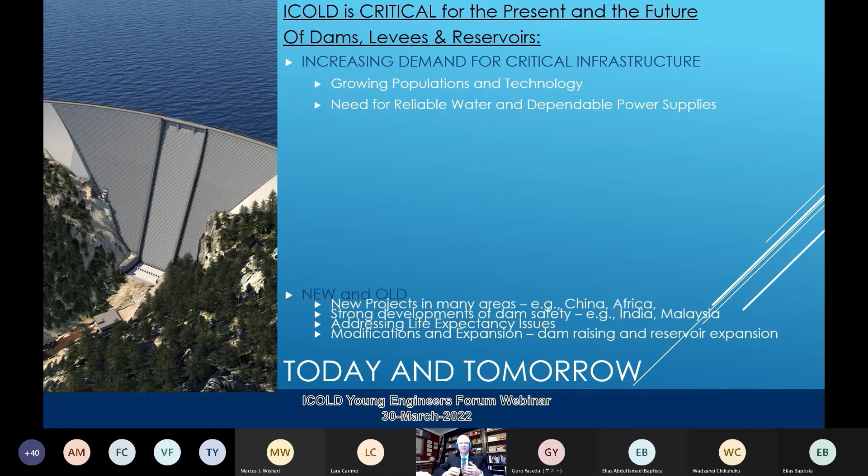We are looking at both new and old aspects of what we do. As engineers and scientists, we are confronted with new developments, but we're also dealing with old projects. Many new projects continue to be developed around the world, especially in areas like China and Africa, where there are very large demands.

We also see strong developments in dam safety programs, which is great. It's an area that's very close to my heart, dam safety, and it has been for ICOLD for a long time. We like to see countries like India and Malaysia and others developing national dam safety programs and codifying regulations to help dam safety, improve dam safety, and protect precious lives around the world.

As we work in these areas, we address the life expectancy issues of our structures. Many of our projects are 60, 70, 80 years old, sometimes more than 100 years old. These older structures require so much care and maintenance that we have to be part of that. Seminars like this today address the modifications and expansions, dam raises, reservoir expansions, and sometimes replacements of dams as the original dams no longer meet the design criteria.

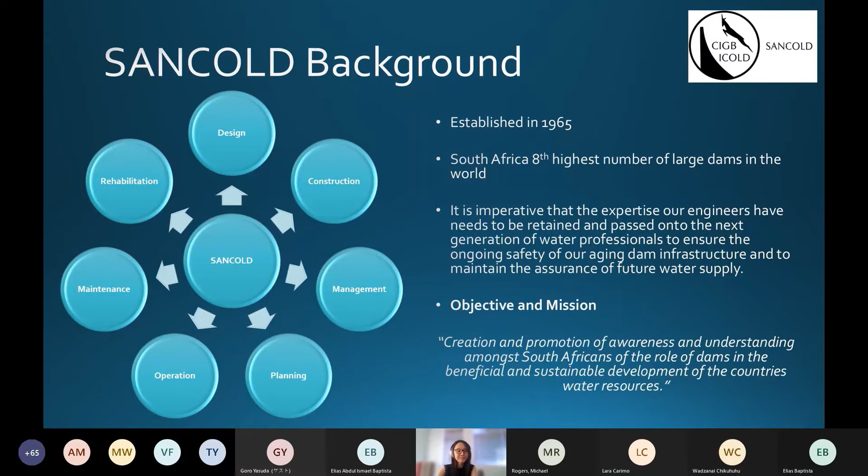So as SANCOLD, our objective and mission is the creation and promotion of awareness and understanding among South Africans of the role of dams in the beneficial and sustainable development of the country's water resources. SANCOLD does this through advancing the knowledge and skills of design, construction, management, planning, operation, maintenance, and rehabilitation amongst our members. The SANCOLD-YPF was established in 2012.

It was mainly established for our members under 35, allowing for a forum for us to interact and network with each other. Our objectives and mission is to transfer skills and knowledge from our older engineers to our young engineers to attempt to fill the age gap that we experience majorly in South Africa. We also want to knowledge share through our webinars, courses, and our online communication platforms, as well as create networking and career opportunities for our engineers and mentorship for professional registration and becoming approved professional persons.

So the SANCOLD-YPF committee is democratically elected by our SANCOLD members. For 2022, we have myself - I am a dams engineer based in South Africa. And then we have Dr. Louis Kutzer, he is a senior lecturer in the civil engineering department at the University of Pretoria with a keen interest in CFRD modeling. And we also have Dr. Janine Vonkerman, a water engineer specializing in sediment transport, river hydraulics, and hydraulic structures. Also, at the end of this year, we will have a position open for our YPF committee, so if anyone is interested, please put your name forward.

For 2022, we are working on developing a 2-year outline plan of webinars and longer courses for our members, allowing for skill set development. We are also indexing existing conference papers, allowing our members easy access to these. Another thing is forming strong and long-lasting relationships with other professional committees, such as SwissCOD-YP, MozCOD, and ICOLD-YP, allowing our young engineers to share experiences and knowledge and network with each other. We have a list of activities for 2022 - I won't speak about them, but if you're interested in attending any of these, please feel free to contact us, and we'll be able to engage with you and share our knowledge as well. Thank you.

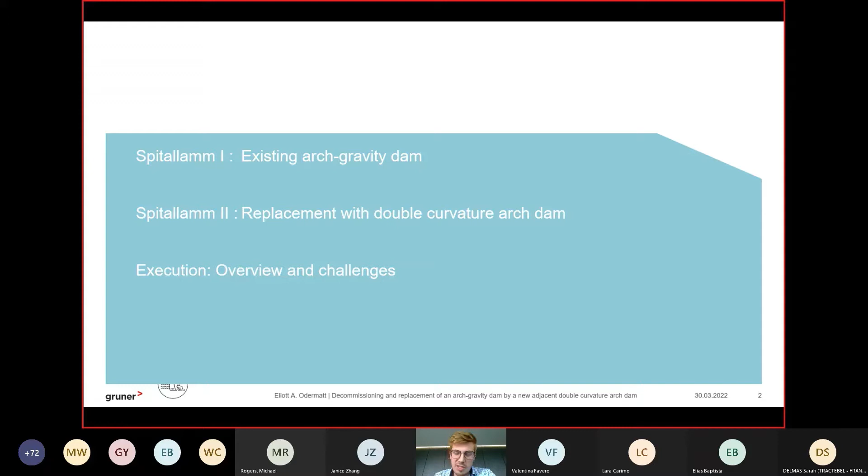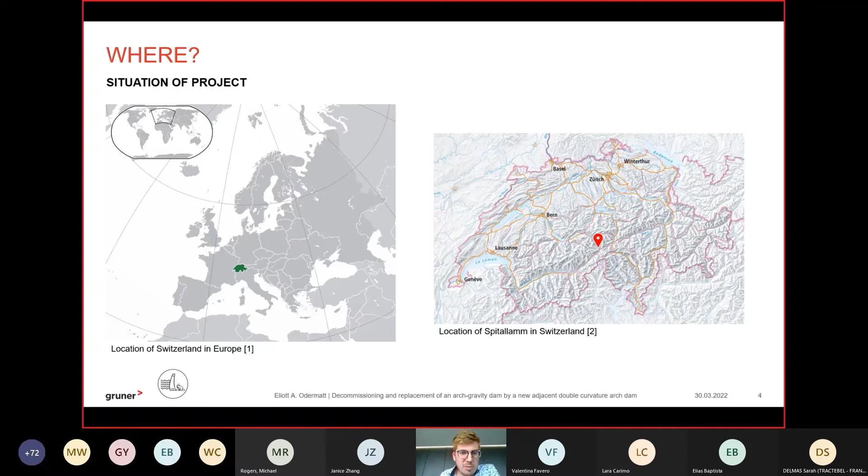Spitallamm 1 is an existing arch gravity dam. We are in Switzerland, in the middle of Europe, with the typical landscape of the Swiss plateau, where we have our big cities, and the dams located in the Alps. The Spitallamm Dam is in the Bernese Alps, near Interlaken and the Jungfraujoch or Aletsch Glacier. Zooming in more, Spitallamm 1 closes a reservoir called Grimselsee Lake, together with another dam. We are located above 1,800 to 1,900 meters above sea level, with a reservoir volume of 100 million cubic meters.

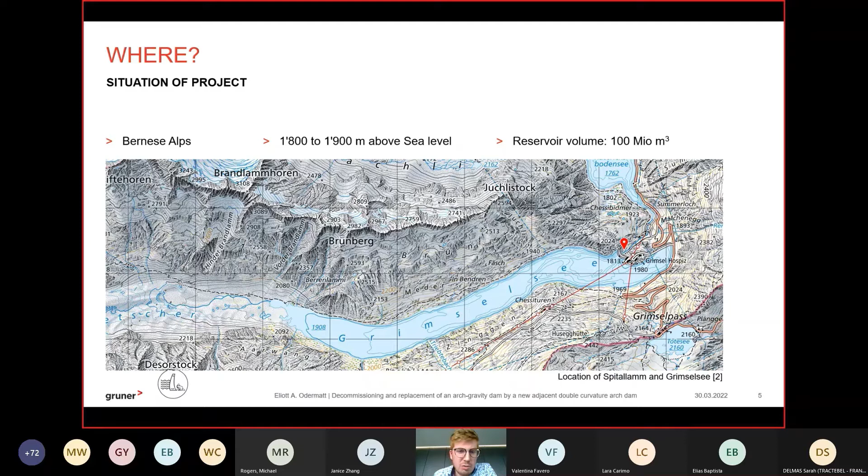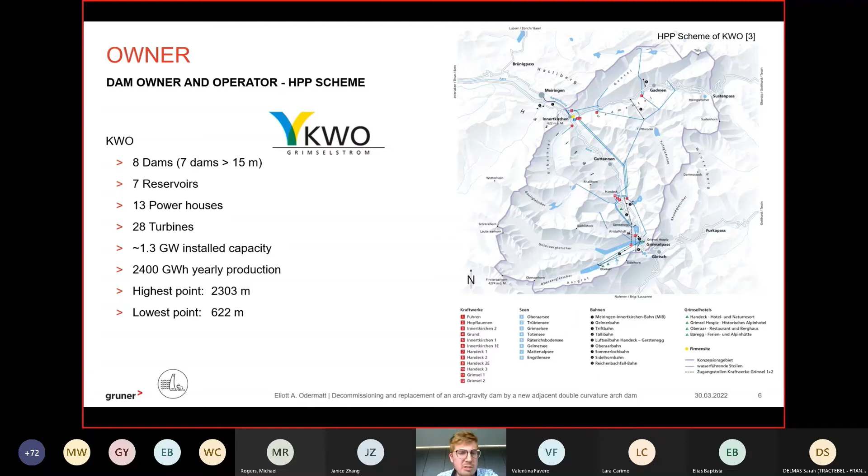A few words about the owner and operator of this dam, because it's important to understand the project. The owner, Kraftwerke Oberhasli, has a scheme made of 8 dams, of which 7 are higher than 15 meters, 7 reservoirs, 13 powerhouses, 28 turbines, more or less 1.3 gigawatt installed capacity, and 2,400 gigawatt hour yearly production. The highest point is 2,300 meters above sea level, and the lowest is 620. It's a typical alpine hydropower scheme, as you can see from the difference in head, and one of the big players in electricity production in Switzerland.

Now to the existing dam, Spitallamm 1. It's an arch gravity concrete dam, built between 1926 and 1932, founded on granite and granodiorite, so very good rock. It has a height of 114 meters from its lowest foundation point to the crest, a crest length of nearly 260 meters, and a concrete volume of 340,000 cubic meters. At the time of construction, it was the highest concrete dam in the world, later becoming second when the Hoover Dam in the US was built.

What is important to understand here is that the dam is made of 3 types of concrete. There is the mass concrete. Then we have an upstream concrete with higher cement content for better water tightness, and to allow the heat dissipation of this higher cement concrete, a void was left behind it, which had to be filled later with a filling concrete.

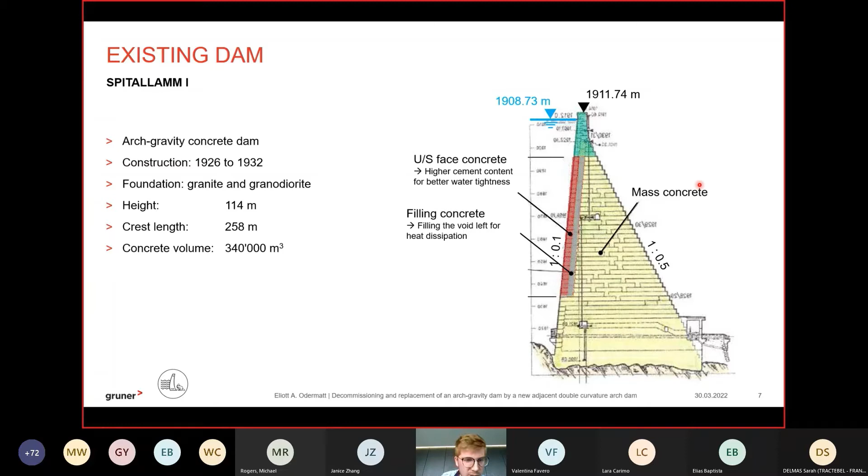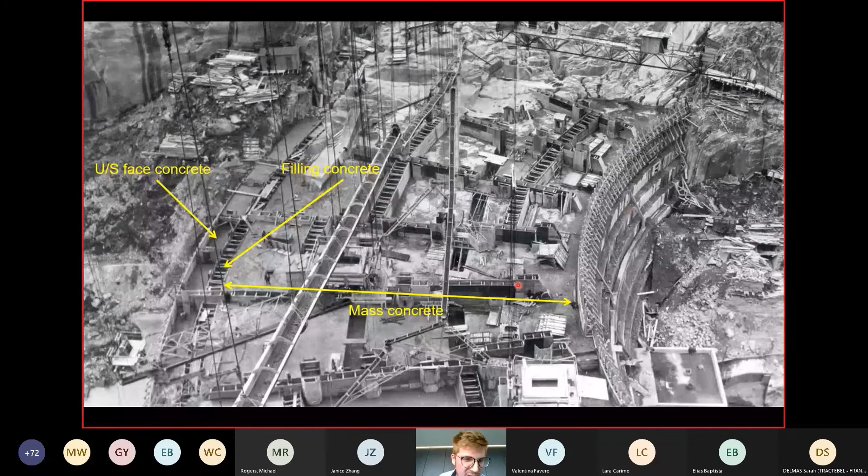Because of the aging problems, the opening trend leads to an intolerable deterioration of safety, and the need for action was proven and was recognized by all the stakeholders.

Now we will focus on Spitallamm 2, so the replacement with a double curvature arch dam. So what are we doing now? We are building a new double curvature arch dam that is adjacent downstream of the existing dam.

And what are the advantages? We have no interferences with the operation of the reservoir. As long as this dam is in operation and this one in construction, the reservoir can be operated. Also Spitallamm 1, the existing dam, is left in place and is then bypassed by a water level equilibrium gallery. That means we don't need to demolish, we don't need to transport the material, and we don't need to store the demolition material. So we can spare a lot of money by operating the reservoir and by leaving the dam in place.

And also, this new dam gives us the possibility to heighten the dam at a later stage. That is a wish from the owner that has a project under discussion. So the dam is designed to be heightenable by 22 meters.

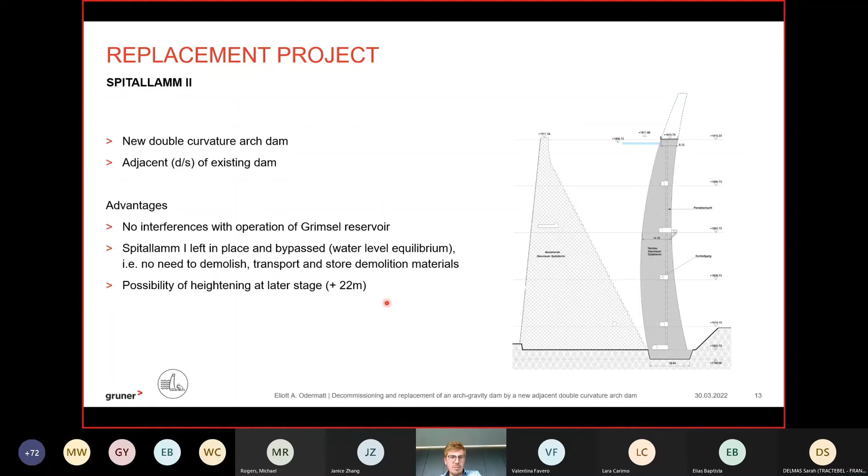So some facts about the geometry. The geometry of the new dam is an arch dam with parabolas, with a height of 113 meters that can heighten by 23 meters. The crest length is about 209 meters with a width of 8 meters, and 4 meters for the heightened dam. The thickness is about 20 meters at the base, and the concrete volume is 210,000 cubic meters.

We see the difference with the existing dam, which was 340,000 cubic meters. We can spare 40% of the concrete thanks to this arch dam, and the thickness at the base is also very self-speaking about the advantages.

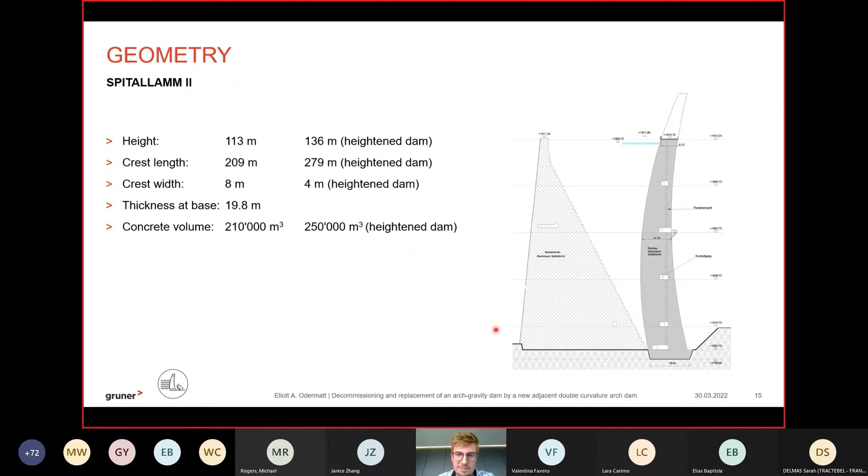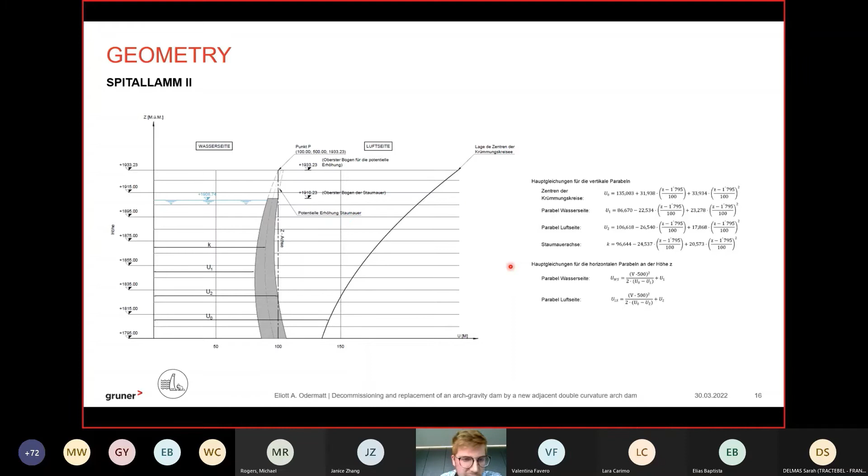So why an arch dam? We are in a narrow valley, so it's perfectly suitable. As I said previously, we chose the parabolas - a parabola arch dam - and here you can see the center of the circle and the equation. We can recognize the typical quadratic equation of the parabolas: the quadratic term, the linear term, and the constant term. These are the equations defining the geometry of the dam.

Here also in plan view, we can see the two main parabolas in blue, upstream and downstream. And also we have the red parabolas here, the abutment parabolas, where we need more thickness because of the higher stresses.

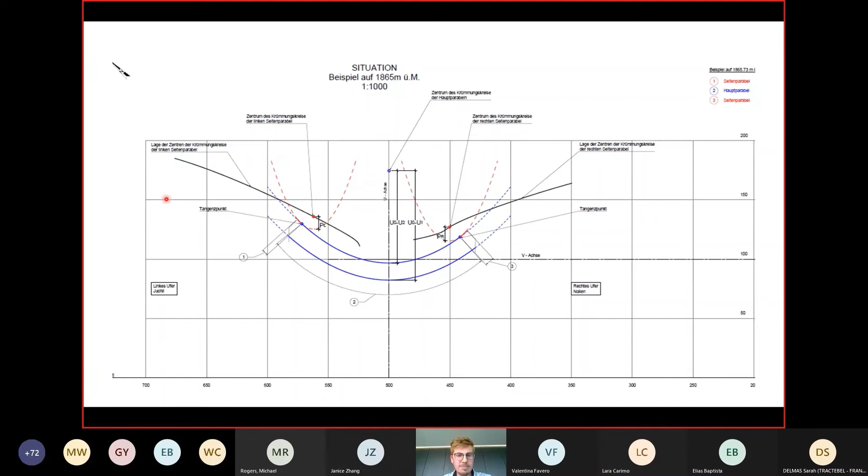So that's about the dam and the geometry. Now I'd like to give you an overview of the construction, the execution, and the challenges.

So the schedule: rock excavation started in 2019, with 2 years of rock excavation. Then we have 4 years of concrete pouring, from last year, this year, and the next 2 years. From next year, we will also start joint and rock grouting, and the last year, '25, will be impounding.

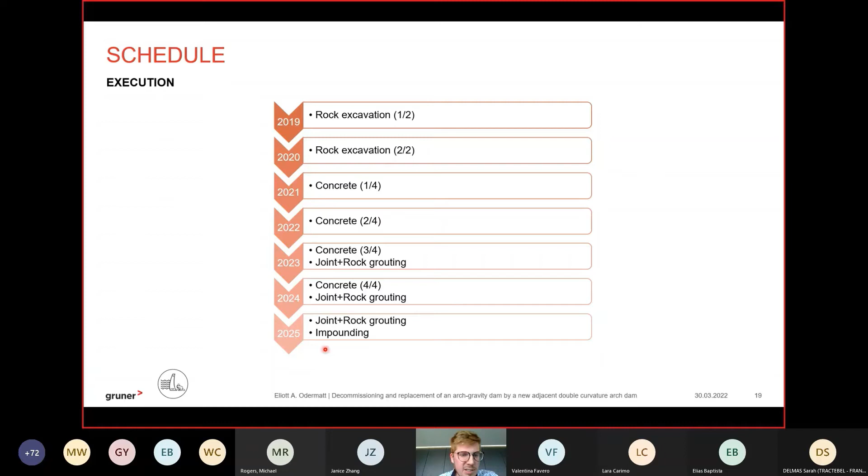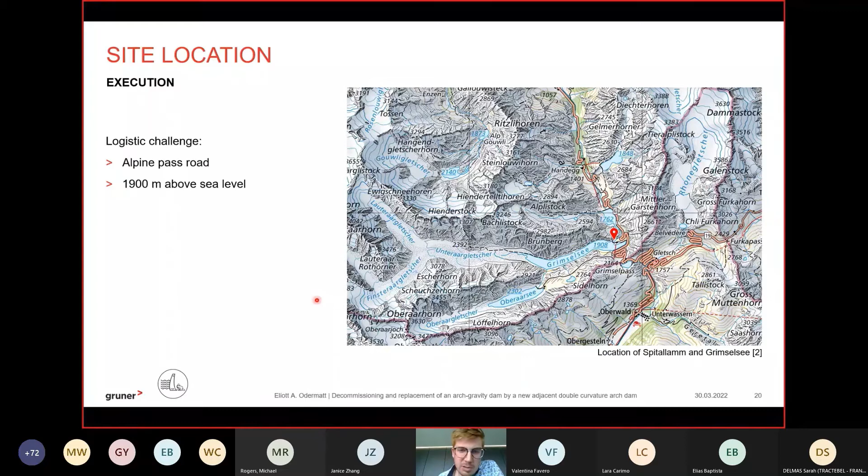So for the site of the execution, here I take you an excerpt of the Swiss maps. You can see we are on an alpine pass road that is nearly 2,000 meters above sea level. So you can imagine the logistic challenge to bring everything up there: the cement for concrete, the people, and all material.

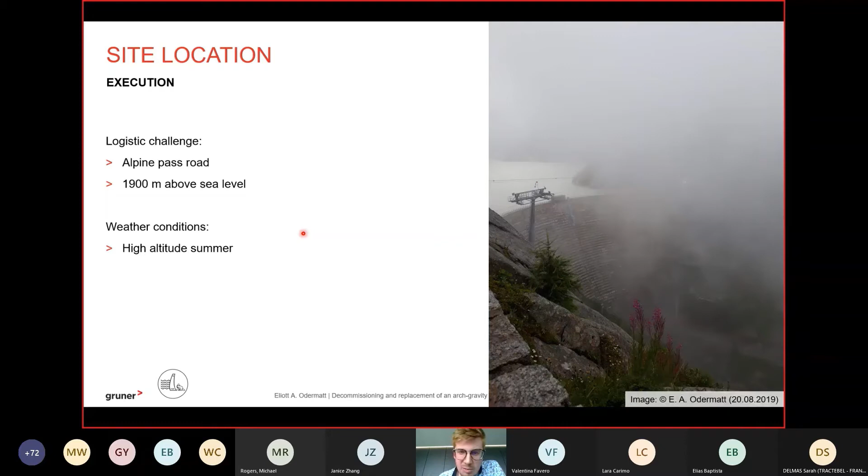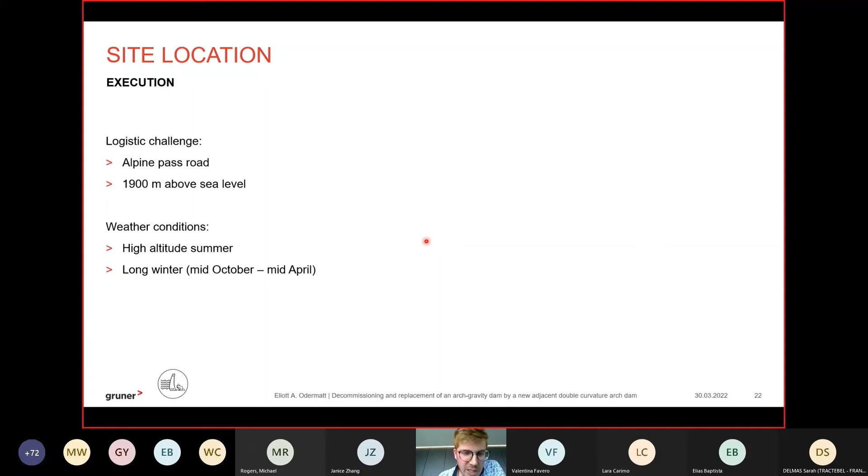Also we are very high in the Swiss Alps, so you can imagine the weather in summer is not always perfect. That's a picture I took on the 20th of August, so it's summer in Switzerland, but up there it was totally cloudy. And we also have a very long winter at this altitude, about mid-October to mid-April. Here are a few pictures so you can imagine.

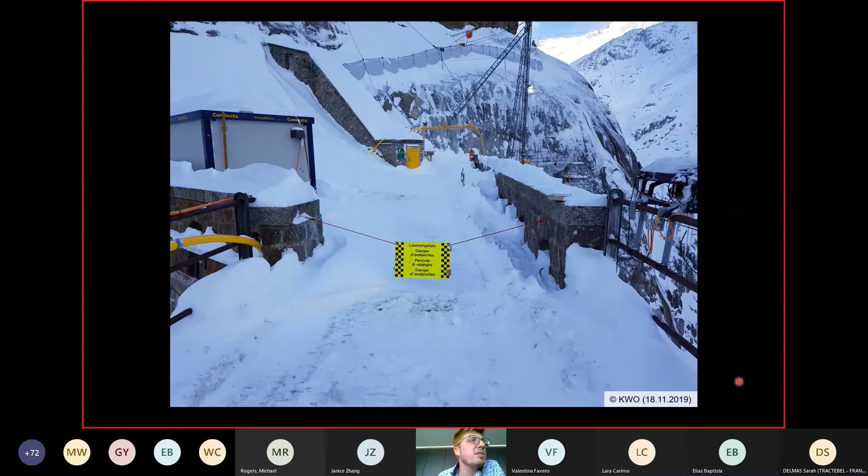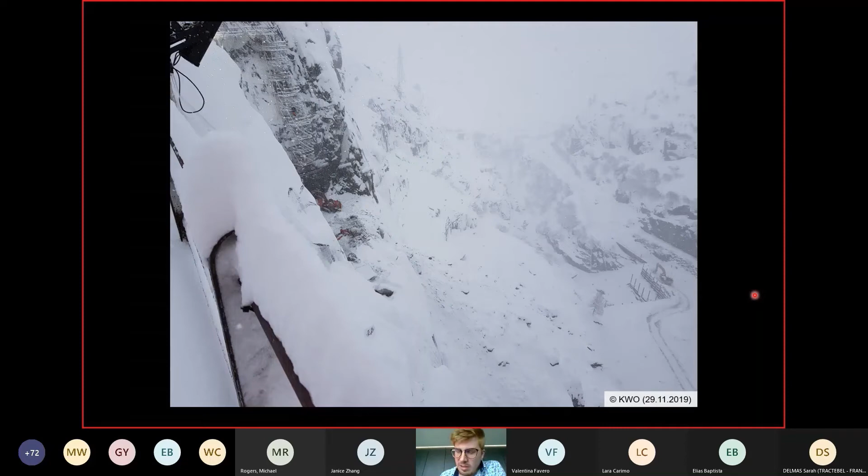We see we are in a zone of danger of avalanches. This picture is from the 18th of November, and it was already snowy. This one is the 29th of November. So you can see it's a pretty big challenge to build at such altitude in Switzerland, because we have very short construction seasons. That's also the reason why we need 7 years to build this dam - it's actually 7 seasons that are only a few months long.

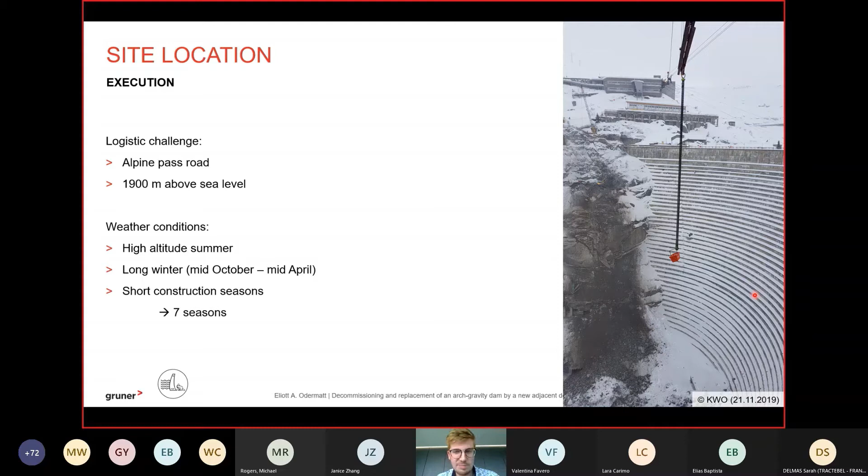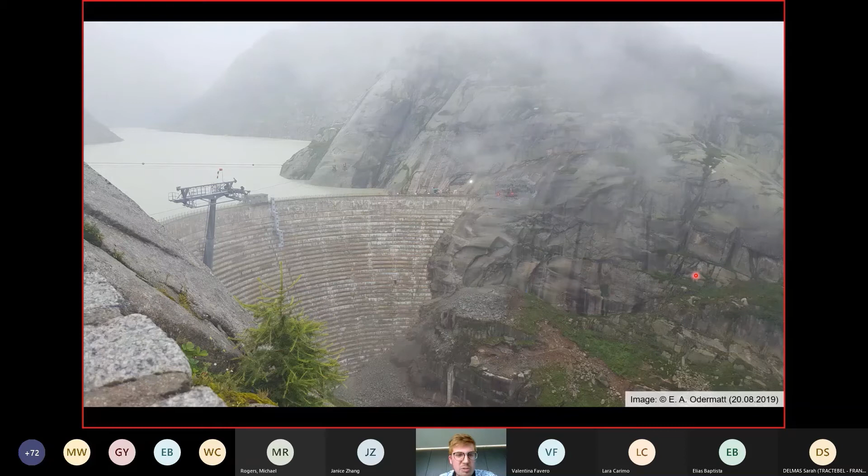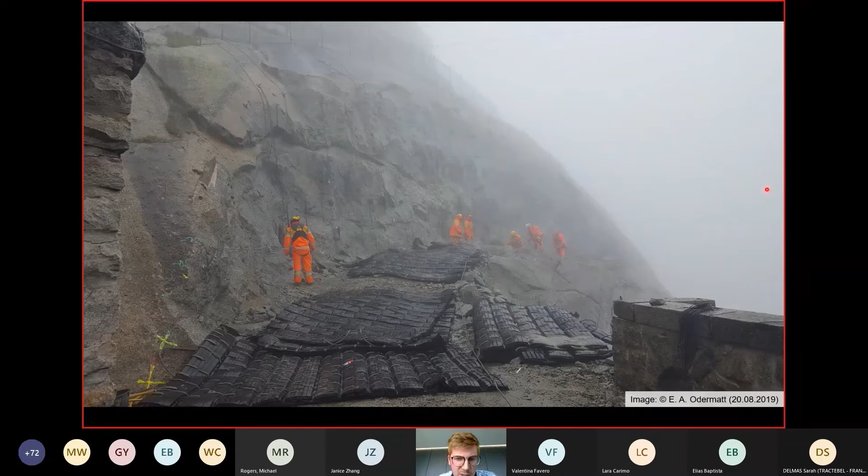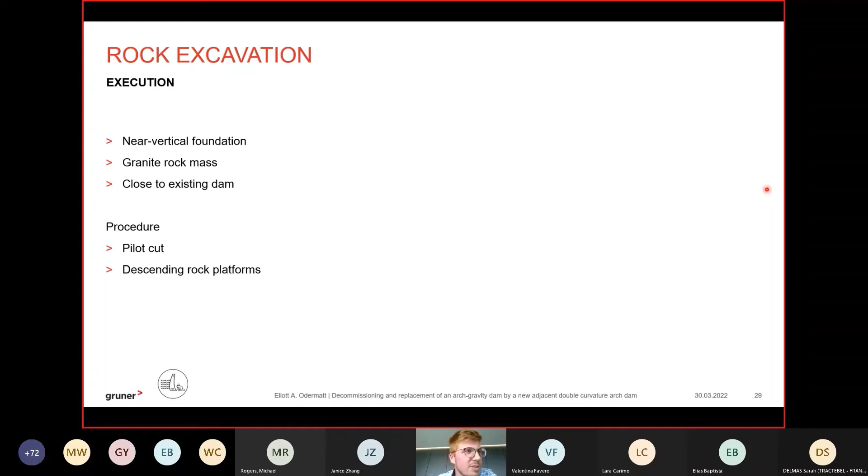This picture can be a bit frightening, but of course we did a very accurate calculation of stability of this dam and the dam abutment. Our federal authorities were also involved - they checked all the calculations, so everything is safe. But you see, it's pretty challenging how close we are.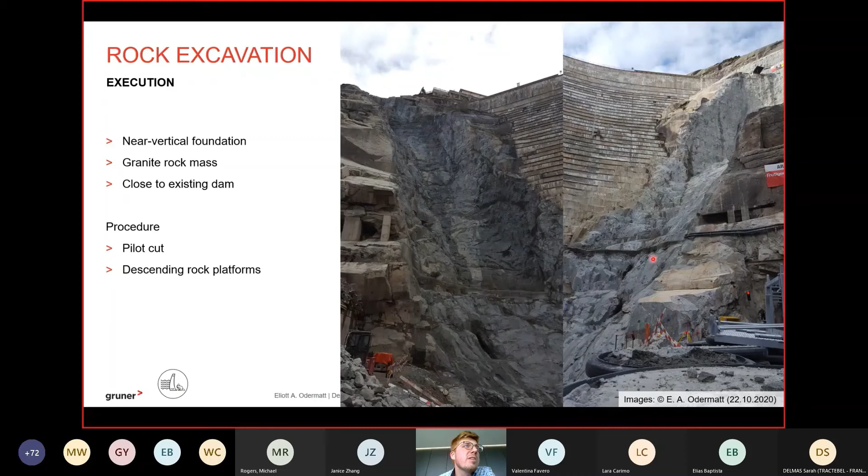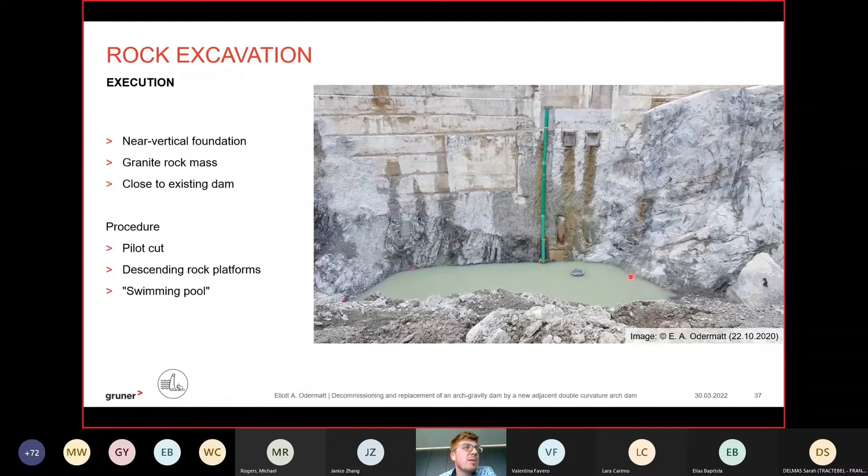And here's the complete excavation for both abutments - this is the right abutment and this is the left abutment, seen from downstream. Also that's the lowest part of the excavation, which we call the swimming pool, that is below the existing terrain. So this rock, a near vertical wall, needs a complicated access. They did it with steel stairs, but you see it's pretty challenging.

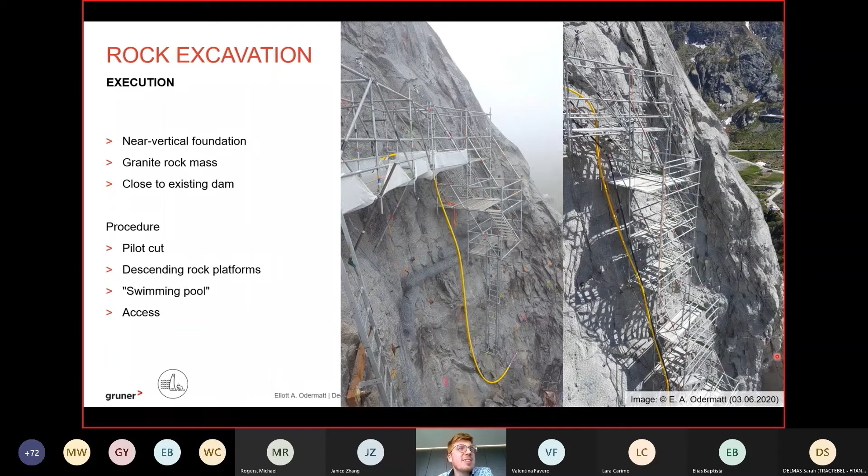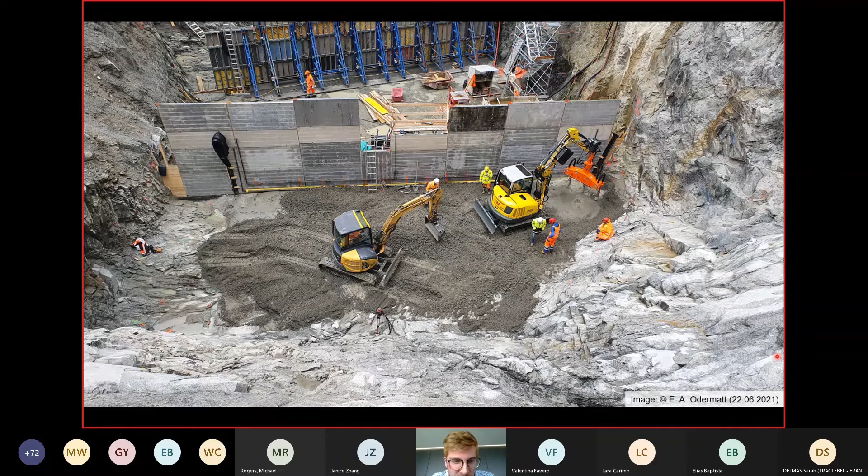Okay, after excavation we had the concrete pouring. We did the first lift on the 22nd of June last year - that's what it looked like. The concrete pouring we're doing traditionally, let's say: we have one machine to move the concrete, and then one to vibrate the concrete. We're mostly using two types of concrete: mass concrete, which in Eurocode is named C20/25, with aggregates from 0 to 120 millimeters, and facing concrete, which is a better concrete, C25/30, with a smaller aggregate, 0 to 63 millimeters.

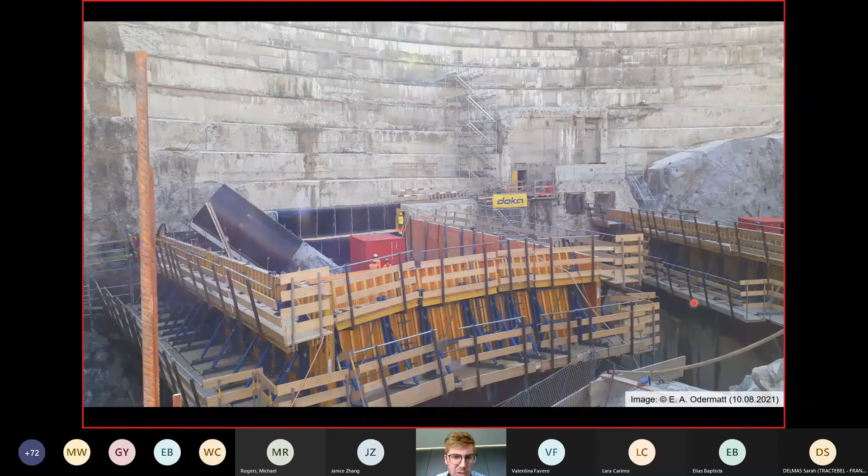So we had the first season of concrete. That's already in August - we see we are already rising with the leader blocks.

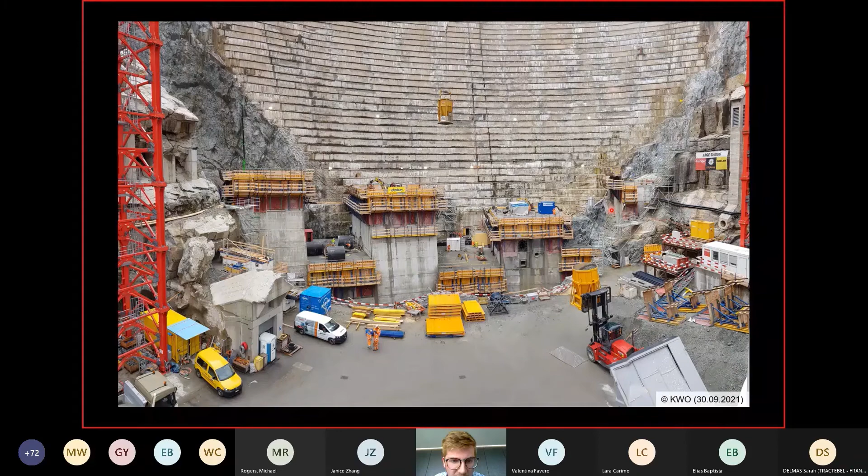And the follower blocks are there in between. Here they started a leader block halfway, and that's a month later. So we see we are rising. We see some galleries here in the follower blocks. Here we have the hole of the bottom outlets.

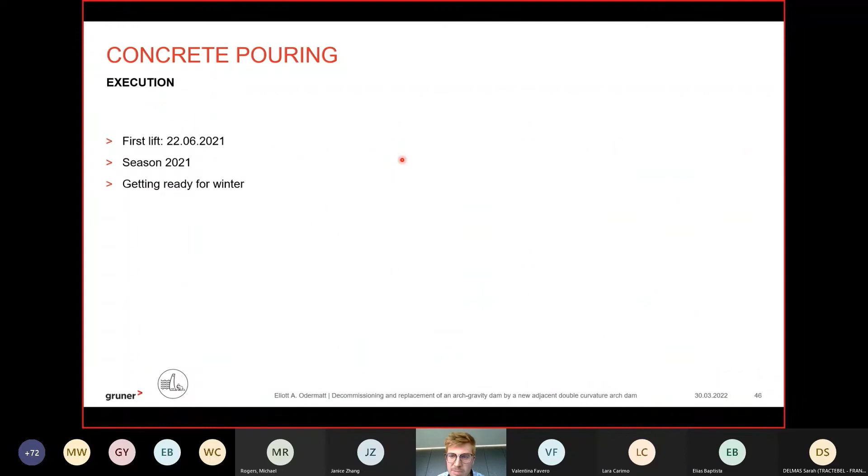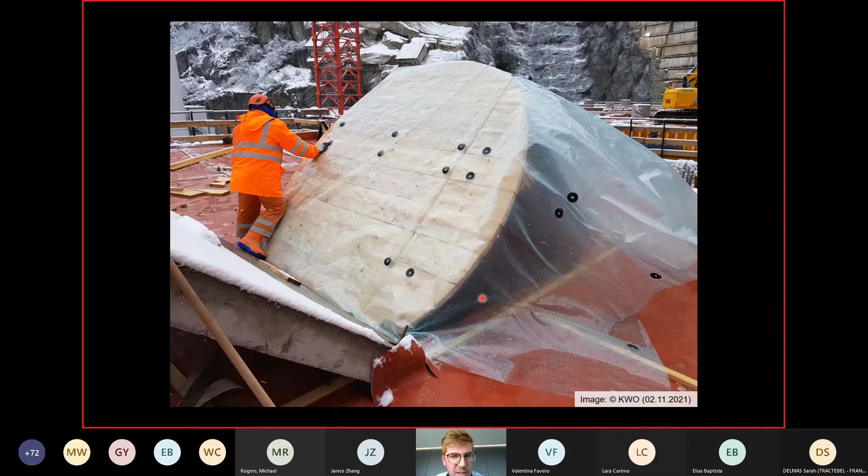At the end of season 21, we need to get ready for winter. So we put some isolating mats on the lifts, and we closed the galleries. The contractor also did a filling with soil on the downstream of the dam. We see they just left the trench for the bottom outlets. And we see very well these leader and follower blocks, a typical skyline, let's say, of a dam construction.

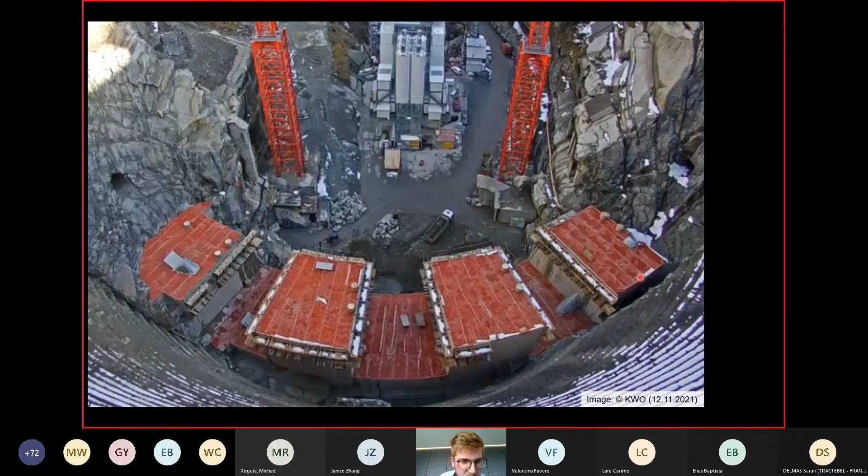And that's a view from downstream with all these mattress isolating mats, and a webcam. This is a bit of poor quality, but it's nice to see also from the upstream the dam being ready for winter.

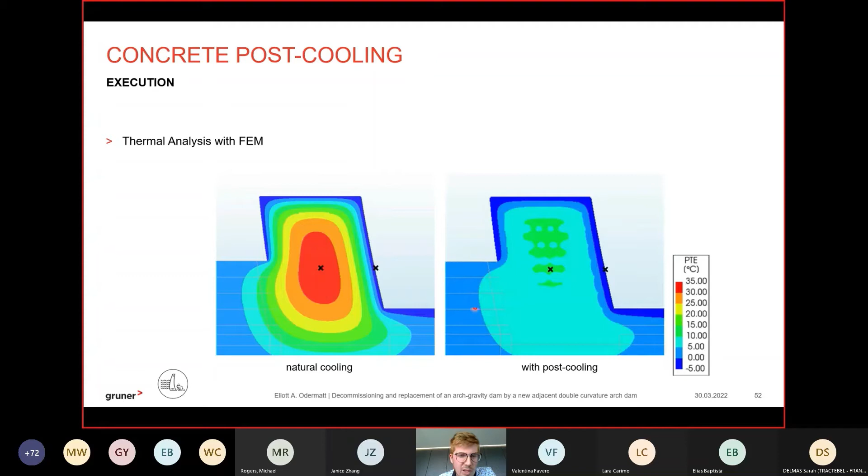Another aspect I wanted to share with you was the post-cooling of concrete. As engineers, we did a thermal analysis with finite element method, and you can see here an outcut of the temperature in concrete using only natural cooling and with post-cooling. We can go up to 35 degrees, and that's why we decided to use post-cooling coils.

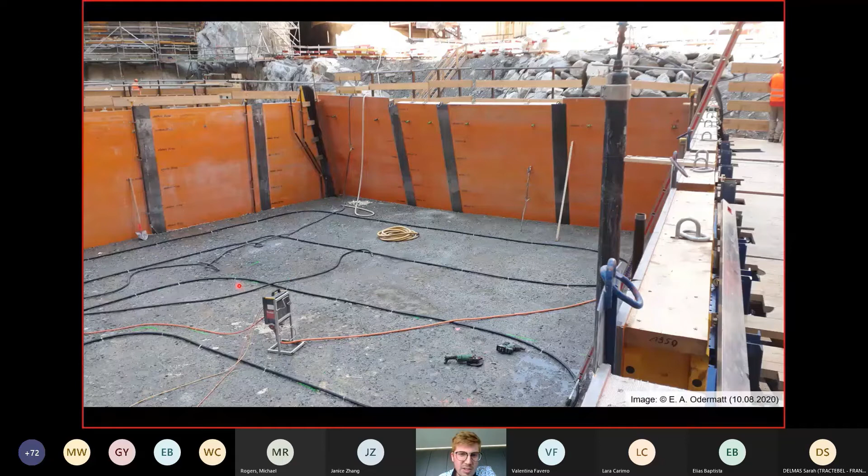The post-cooling coils, that's more or less what they look like before being embedded in the concrete. We feed all the coils with a conveyor pipe. This huge pipe here is feeding cold water, and then we have the return pipes. All the coils have return pipes that go to a gallery.

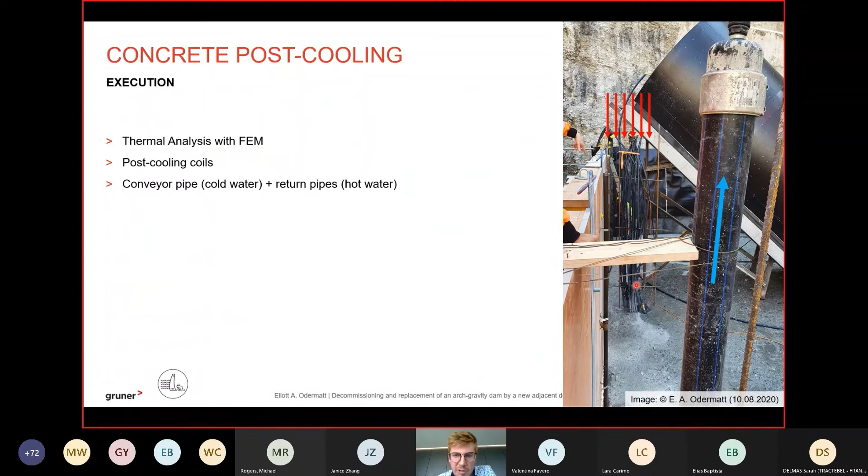So yes, everything is connected to galleries thanks to lateral niches. And here's what it may look like. We have these big feeding pipes and all the coils coming back in the galleries, so we can regulate every single lift thanks to the single coils coming back.

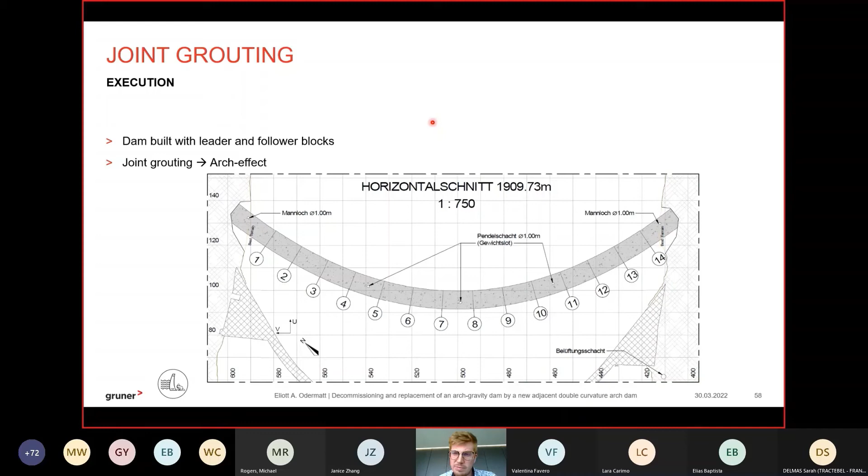Another interesting aspect in my understanding is the joint grouting. As I said, we are building an arch dam, but with leader and follower blocks. That means we have joints in between, and we need to grout these joints to add an arch effect. This is an execution drawing for joints. We see we have an entire piping system.

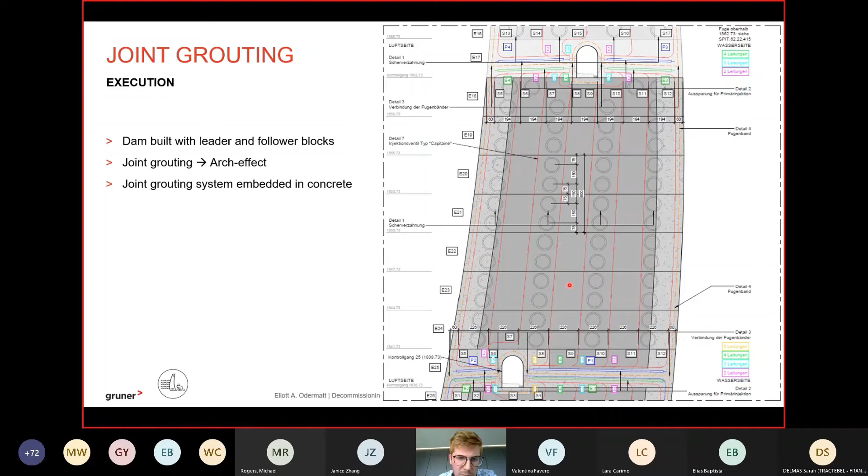Also nice details here are the shear keys, and they're only in the upper part of the dam. This joint grouting system embedded in concrete looks like that. So we have a groove that is used to pump in the grout mix, and on the opposite side of the panel we have a vent which is built exactly the same way, and this allows the air to let out of the joint and fill it with the grout mix.

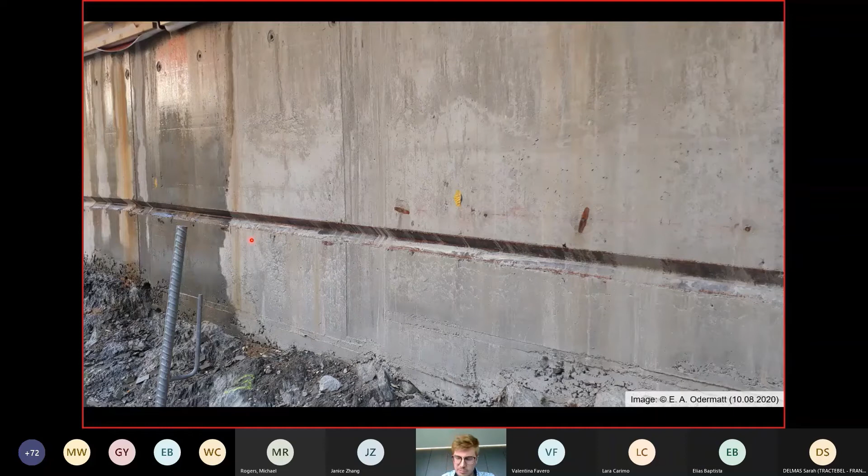Another key element of this grouting panel is the water stop, and here we see a water stop that's built in a leader block. When we take out the formwork after pouring, it looks like that. We just need to unfold it, and we can have it through the leader and the follower blocks. I wanted to show this picture because you see it's a really complicated thing to execute, although it may look very simple on paper.

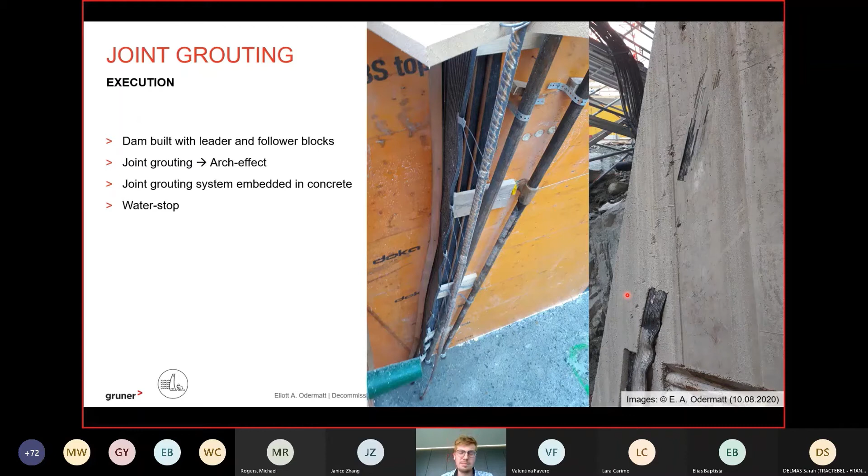Also the entire grouting system is connected to the galleries. So if we take our picture from before, we have here our cooling system, and here we've got all the pipes for the joint grouting. We also saw these water stop bands around the galleries, the groove, and the pipes.

So with that, I'm coming to the conclusion of my presentation. The Spitallamm Dam is in execution since 2019, and impounding will be in 2025, hopefully. For me, as a young engineer, it is a unique opportunity. I don't think there are a lot of arch dams under construction in Europe. Maybe it's the only one. For Switzerland, it's clearly the only one.

We have many challenges with these construction sites. As you have seen with the details, building a dam is not only pouring concrete. We have a lot of details, a lot of embedded systems. Yes, it was a big challenge, and I'm really happy to work on this project.

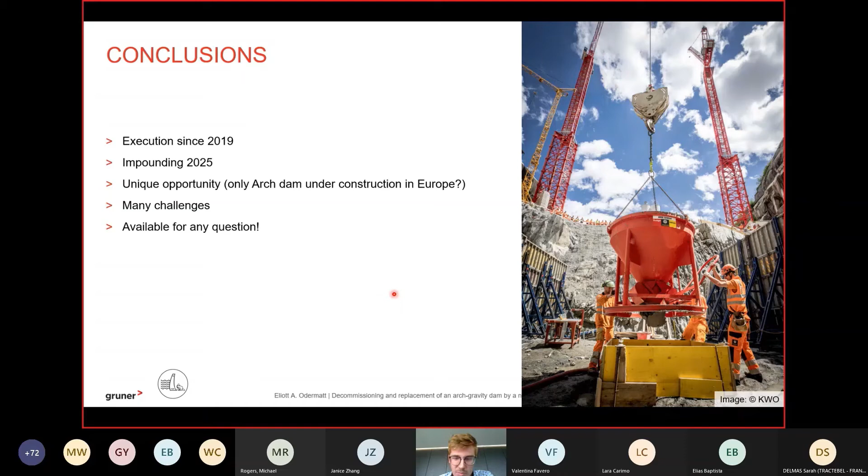If it's avalanche safe, because it's still winter in Switzerland, we also have snow coming in the next days, so maybe they will be delayed. They will need to clean first the access roads, and then they can clean the site from snow, and finally the dam, and they can start to build again.

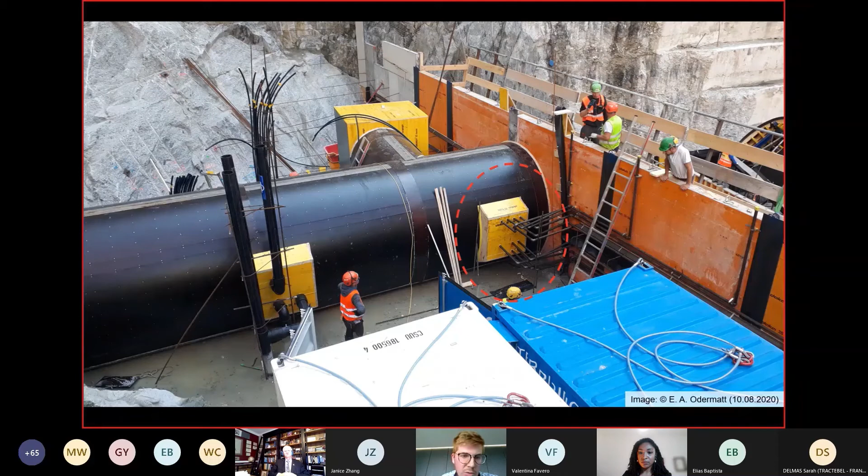So here I can share my screen again, and just go back to the gallery pictures - maybe this one is a good one. So here they're done with regular formwork. Let's say the tunnel part or the gallery part is done in pieces, and they add some local formwork when needed. When the concrete is poured, after a few weeks, I think 2 weeks maybe, they take the formwork away and use the same formwork for other places for the next gallery. So it's not permanent, it's really decast - I don't know if we say it like that in English.

As I said, it was a wish of the operator to see the concrete of the dam. Also it's a philosophy here in Switzerland that we do this monitoring at a very high level, and we want to see the concrete evolving - we want to see the cracks, if they are changing, if they're closing, if they're opening. For that you need to be in direct contact with the dam concrete, and that's why we have this traditional formwork that is not permanent. I hope it's clear.

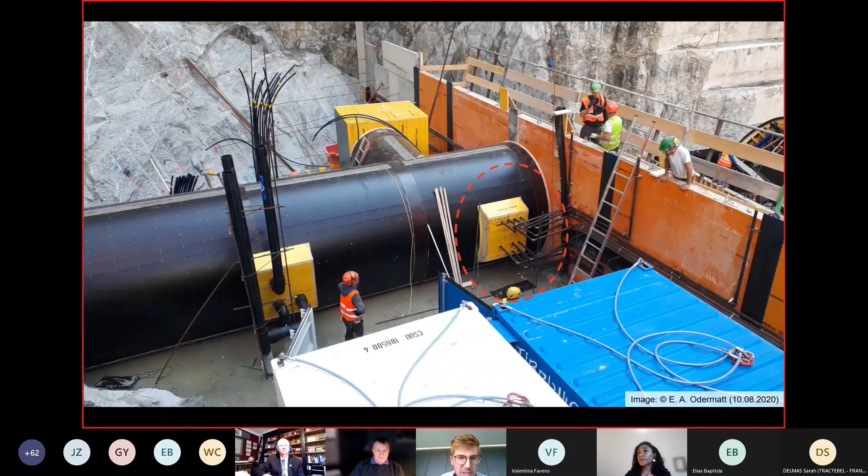Thanks a lot for the question. I will share my screen again - we can bring up my presentation again, so maybe just show the plan view of the dam.

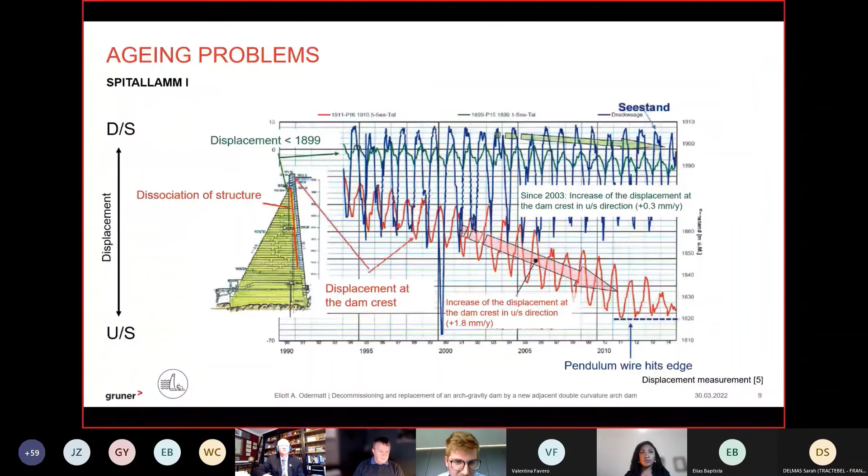Let's go back. So the geology, I have to say, is excellent. Up there, we are founded in granite, but we have some faults - really closed, really small faults. So the reason was not geological; it was mostly geometrical, as I said.

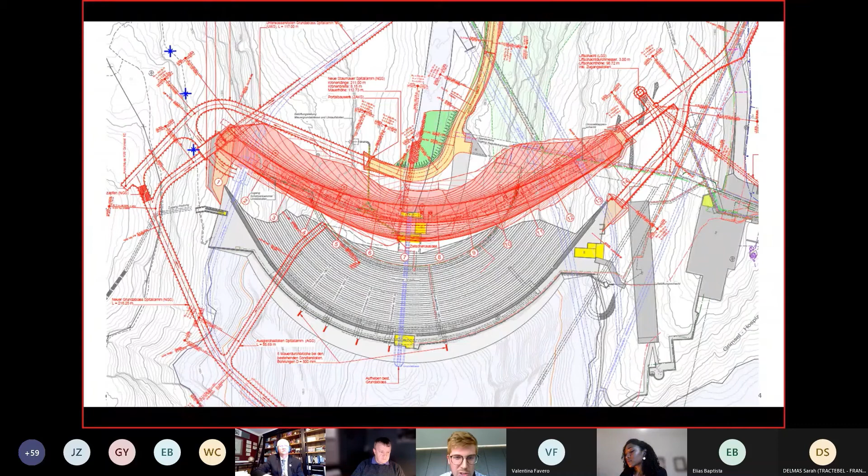We are blocked, let's say, geometrically. Here's the existing dam, so of course we don't want to go too much upstream. And here, what you see is an existing cavern or gallery, a rock gallery, and we can't go too much downstream because of these existing structures, since they cannot be flooded. So we had a very restrained space, and we could try to rotate a bit, but because of the form of the valley, that's why we decided to put the dam here.

Of course it's very close, and in the picture it looks like it's very close, but as answered previously, this circle here unloads its forces mostly according to the 3D calculation. That's why it's close, but it's not actually a problem. For your question, it was not a geological reason - it was really geometrical, because the geology is excellent. We really can't complain about the geology. It was mostly the geometrical challenge of putting everything together.

Great, thank you very much. Thank you for your question.

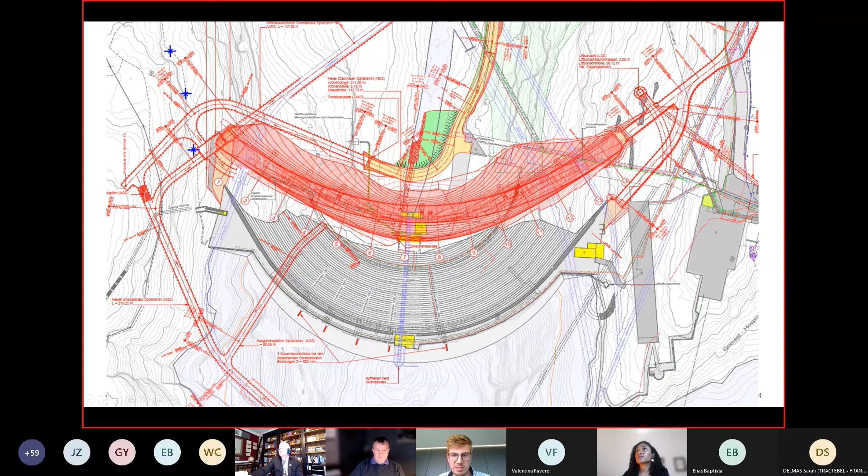Next question is from Felipe Vicente Lázaro: some insight on environmental impact assessment and any specific or particular requirements. Maybe he's questioning about the environmental license for this new dam.

I must say the truth, I'm not really aware of this aspect. We were mostly involved for the structural design and the calculation. As I answered before, I think the impact is pretty low in the sense that the damage was already done with the existing dam. But I'm sure we have a law in Switzerland that asks us to evaluate the impact of every big project, so I'm sure there was some evaluation according to Swiss law.

Philip Lazar raised a hand. Can you please go? Yes, thank you. I just want to complete the question. I understand there is no limited permanent impact, but during construction, the fact that you have to transport all the materials and stockpile them on site - probably you have some specific requirements. We know it's not easy to build a dam in Switzerland at this altitude. Thank you, and best regards from Washington.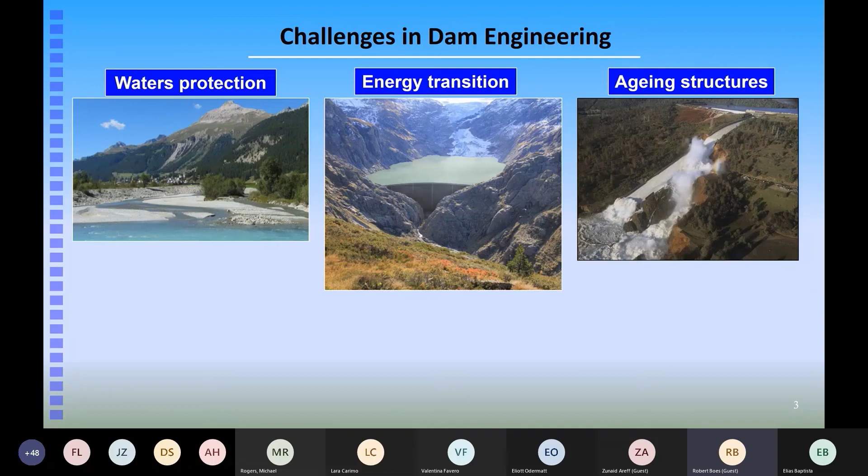If you press again, you should see more photos. On the left, sediment management is a big issue. We heard about this today, because our reservoirs fill up with sediments, closely related to water protection. If we want nature-like rivers, we need sediments in the rivers too. So we should pass sediments, wherever possible, to the downstream reaches and not trap them behind the dams. This is a win-win for ecology and for dam operators.

Climate change adaptation: dams, and especially reservoirs impounded by dams, greatly dampen floods and provide water in times of scarcity and droughts. This becomes more and more relevant, as we've seen recently—think of last year's large floods in Central Europe, India, and China. This is a vital role again.

And last but not least, safety and resilience. In mountainous and alpine areas where we have many reservoirs and dams, there is an increasing threat of natural dangers and hazards due to instabilities from permafrost thawing and so on. So this is a vast field of challenges for dam engineers, and the young engineers taking part in this webinar have a great amount of interesting work ahead of them.

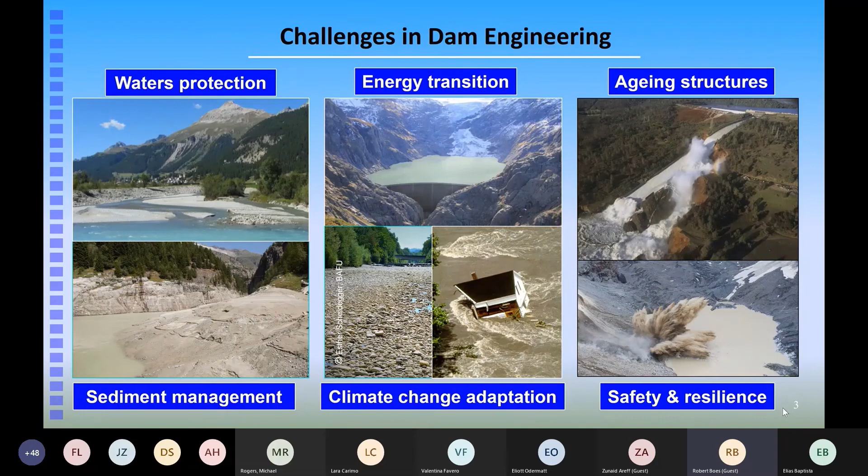This is in line with our 75th anniversary of the Swiss Committee on Dams, which will take place in 2023. We decided on the topic of the role of dams and reservoirs for a successful energy transition, because this is important in Switzerland and in a number of European countries where hydroelectricity is the central part of the energy system.

By the way, we will offer a one-day field trip to the Spitallamm Dam, today's center of focus of Eliott Odermatt's presentation. You will have the chance to see the site under construction and learn more about it. I heartily invite you to attend this European Club Symposium next year in Switzerland.